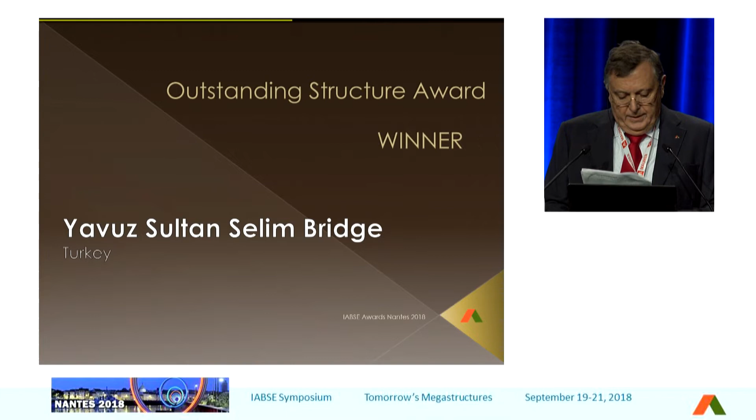This year we have the Yavuz Sultan Selim Bridge, the third Bosphorus Bridge in Istanbul, considered as the future of transportation and commerce for Turkey, linking Europe and Asia by its major importance and its symbolic situation between the two continents. The bridge has become an iconic structure and a landmark of the Istanbul region and Turkey.

May I ask Naeem Hussain, please, who is the chair of the award commission. And the awardees, may I invite now Mr. Samet Sain, Mr. Thierry Delemont, Mr. Vincent Deville, Mr. Michel Virlogeux.

The laudation of this structure is that the Yavuz Sultan Selim Bridge exemplifies an outstanding concept of combining the advantage of suspension and cable-stay systems, as well as design and construction with the most advanced technologies in structural engineering. It epitomizes a holistic approach of engineering and architecture.

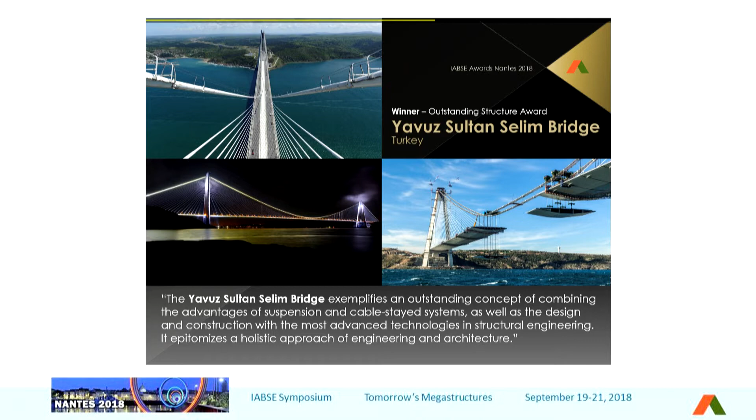Within this award, we also refer to the three finalists. The first one is the viaduct over the River Almonte in Cáceres, Spain. It's on the high-speed railway between Madrid and Extremadura, crossing the River Almonte through a 996 meter long viaduct with a great 384 meter concrete arch, making it the largest HSR arch bridge built to date.

May I call Mr. Pablo Jimenez, Mr. Guillermo Capellan, Mr. David Arribas, and Mr. Pedro Cavero de Pablo.

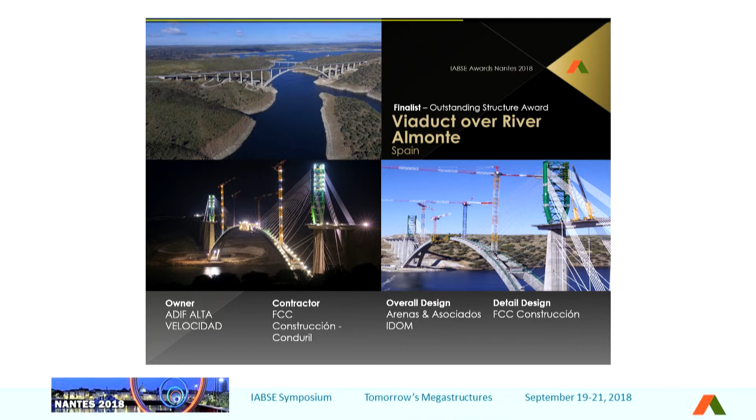The other two finalists are the Queensferry Bridge in UK and the Circle Bridge in Denmark. Unfortunately we do not have the representatives here, so we shall just give congratulations to them, and we give the awards to the chair. I'm taking this on behalf of the Queensferry Crossing people — I just happen to have a little bit of interest in it — and I'll give it to the awardees. Thank you.

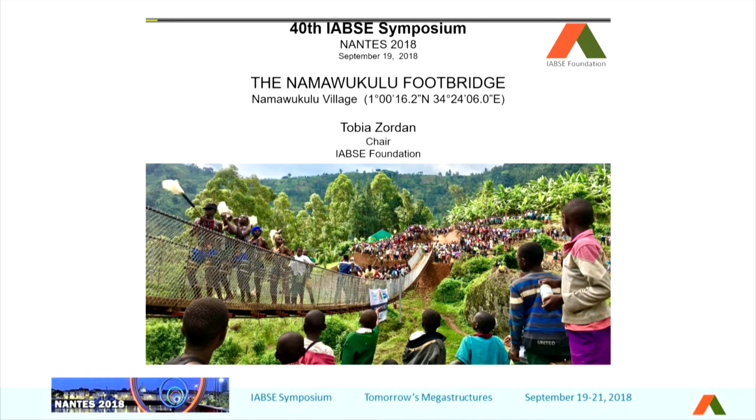Good morning, ladies and gentlemen. Thank you, Bruno, and thank you to the organizing committee and to IABSE for giving the foundation this space. I'm very pleased to be here today on behalf of the foundation to present our latest achievement. It's a bridge, a bridge in Uganda. It has quite an interesting story, and I hope you will enjoy it, and that you'll be able to share more challenges in the future with us.

A few words about the foundation. It is a totally independent and non-profit institution run on a fully voluntary basis. We receive funds and we give out funds, so as much as we receive, as much we are able to provide. The goal is spreading the knowledge of civil engineering and promoting education programs and self-construction in the most disadvantaged areas of Earth. The challenge last year was to build a footbridge in Uganda, a footbridge with a very high symbolic value and meaning.

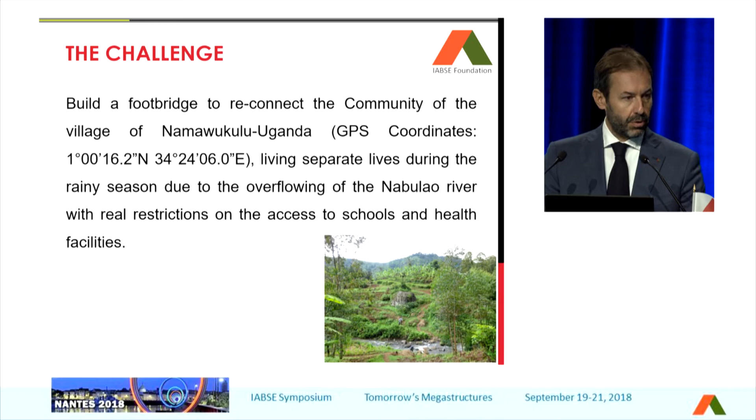A bridge can reunite two separate parts of a village which is cut by a river, flooded during many, many days of the year, more than four months. Of course that creates problems for locals, and we will see what kind of problems in a while.

The partners of this venture: the project was proposed by Bridges to Prosperity, and we took the advantage. It was a very interesting project. IABSE is all about bridges, so we thought it was a fantastic occasion to have the chance to build a bridge.

So we took this challenge. We decided we wanted to be partner in this venture, and we shared the price with Ramboll, the other partner that paid for 50% of the cost. But we are IABSE, we want to be not just a financial partner. We are bridge engineers, we wanted to be a technical partner. More than the money, we wanted to put effort, knowledge, strength, passion, and our sweat.

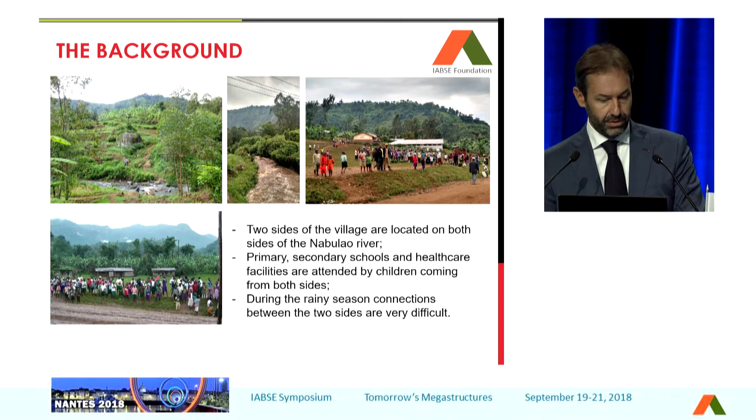The background: what we found was a village separated in two parts. A lot of children and locals were not allowed access to healthcare facilities and schools for a big part of the year, especially during the rainy seasons. You see here some short movies, a lot of enthusiastic boys, a lot of expectations to see what we could do, and if finally they could get a bridge that could improve the economy and the social relationship of the local community.

The project was provided by Bridges to Prosperity. This is quite a standard project. Of course, we are engineers, so the project was double-checked, and we thought it was very simple, very cheap, but also reliable. And we decided we wanted to go for it.

The most important part, the team of volunteers. These guys are engineers, and they decided to go on site and put everything they had in order to get to the final results. Young people, a lot of energy, a lot of enthusiasm under the flag of IABSE.

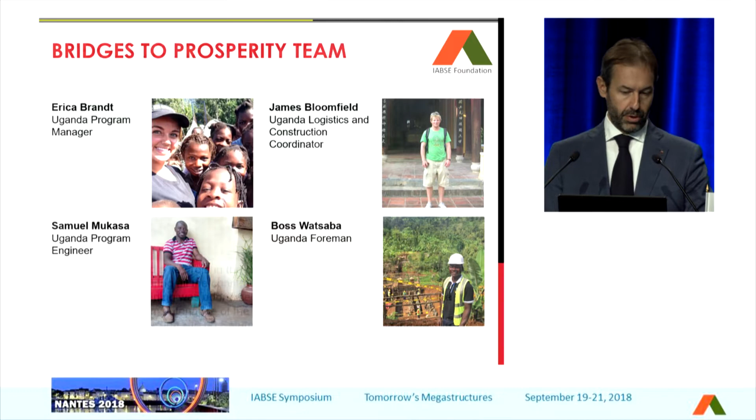Very good organization on site provided by Bridges to Prosperity. You can see here some of the people involved: a general manager, a manager for logistics, a local site engineer, and a local foreman to check everything was going on there. The local community played a fantastic and key role in the construction of the bridge.

They showed very high motivation. They were trained before the beginning of the construction, with a period of training, and on Saturdays the work site was fully open for the local community to come and enjoy, and of course contribute.

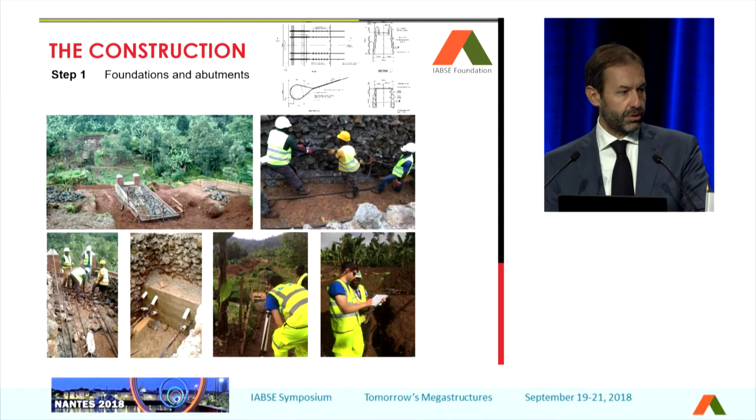Then the IABSE team arrived, and with the local team, Bridges to Prosperity, and the Rumble team, completed the foundations and abutments. Our engineers worked as carpenters to prepare all the details, to lay the cables, to bend the bars, to prepare the fences. And I have to say I'm very proud of it.

We started from the beginning, and roughly in one month we got to the completion of the bridge. You see here some phases. I have to say that I'm very thankful to the team that worked on that.

And we finally got the opening of the bridge with the dynamic test of the structure. Very risky actually, because we made some measurements about the frequencies, and we were very concerned when we saw people jumping and dancing on the bridge.

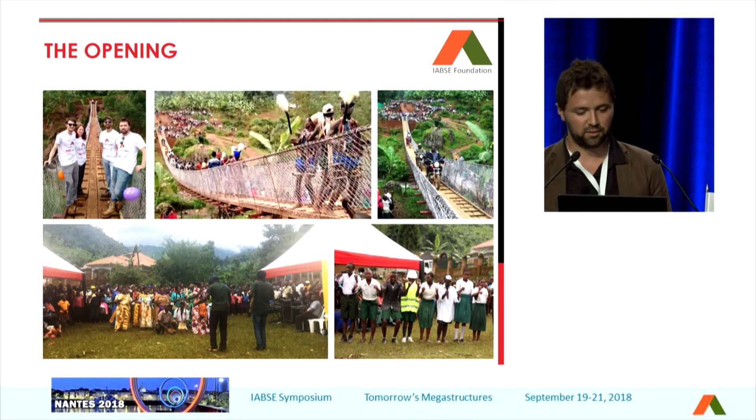This is, I guess from my knowledge, the first bridge built under the IABSE flags. So this is our bridge, this is your bridge, this is the bridge of all the members of these associations and of all the volunteers. We want to continue this. We have plans for next year. We would like to meet yourself again in September with another achievement. But of course,

we have to thank the volunteers, and you see their names from IABSE. They always were wearing IABSE t-shirts and IABSE flags everywhere. But more than that, we need you. So we need every single contribution, it's very important. So please help us by donating big money, little money, whatever you can, your time, everything is important. I hope we can continue. I hope you can help us. Thank you very much.

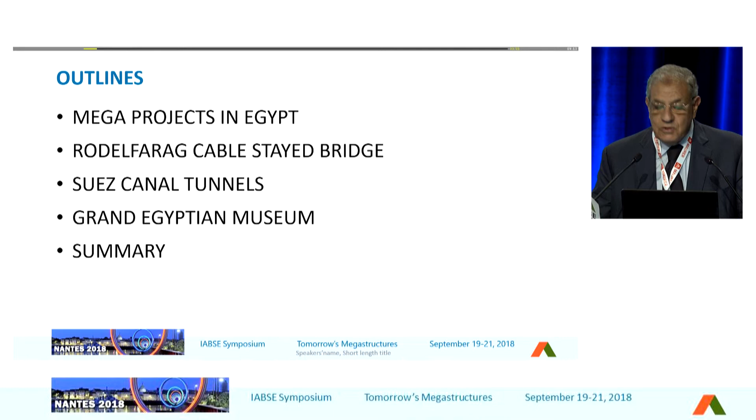The revolution in January 2011 took its toll on the Egyptian economy, resulting in a slowdown reflected in deterioration of the real GDP growth rate and increased unemployment. Total investment witnessed a material downward trend, and the country's foreign reserves were depleted significantly. This shows how employment and the Egyptian economy collapsed after the revolution. Consequently, rating agencies downgraded Egypt's sovereign rating by around 6 notches from January 2011 to July 2013.

We found that the only way to energize and activate our economy was to go for mega projects. During the last 4 years, mega projects in Egypt have been diversified. We started with a very big project, the doubling of the Suez Canal. We dug a new canal parallel to the existing one, with millions of cubic meters of dredging. During this period we used 22 dredgers, and we achieved this project in 1 year.

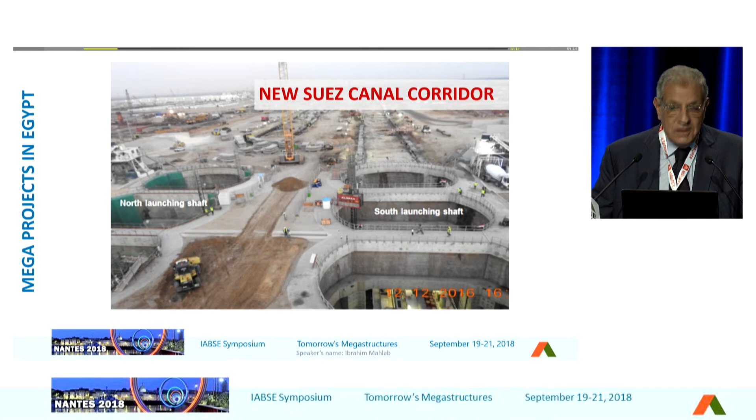The second one is electrical power station plants - we added 25,000 megawatts to our grid in 4 years, which I think is the biggest project in the field of electrical generation. Affordable houses: 1 million units are planned, and we have achieved 650,000 units so far. New roadways: 7,000 kilometers added to our network in 4 years, which is also a very remarkable project in Egypt.

Reclamation of the desert: we are adding 1 million acres to be reclaimed in the desert. New cities: 14 new cities spread all over Egypt, and a new administrative capital is now under construction. This means Egypt is now a very big site, working 24 hours, 7 days a week. Fisheries: we established a big fishery of 3,000 acres in the north of Egypt. Restoration of heritage and monuments: Egypt is full of heritage and monuments, and now we are starting to restore them.

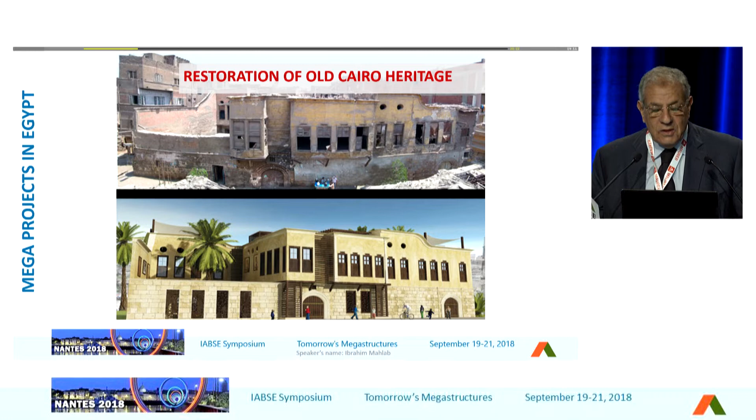Among Egypt's mega projects, the Rod El-Farag cable-stayed bridge is a remarkable bridge we can really present, along with the two other tunnels under the Suez Canal we have to highlight, and the Grand Egyptian Museum.

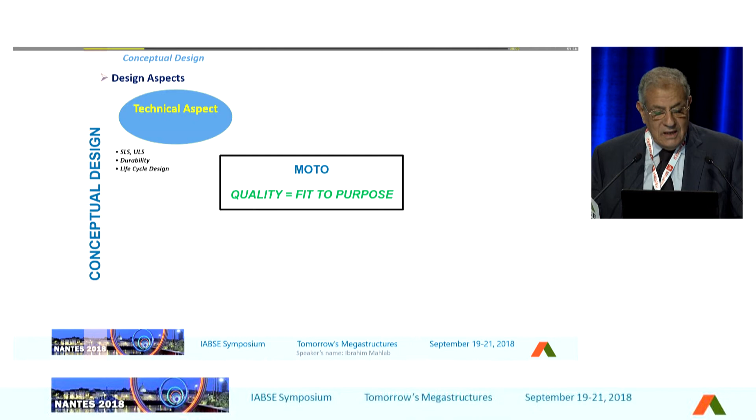Our motto is quality equal should fit to purpose, and this was the concept of our thinking: technical aspects, economical aspects, formal aspect, and environmental. Those are the 4 factors we worked with, because we don't have really time, and it is a question of how to select the most optimized, the most economical project, and to start immediately construct.

Design condition, functions, client wish, budget, resources, location, construction - give us the design aspects, design alternatives. Always we have to think about value engineering and to choose the most optimized project.

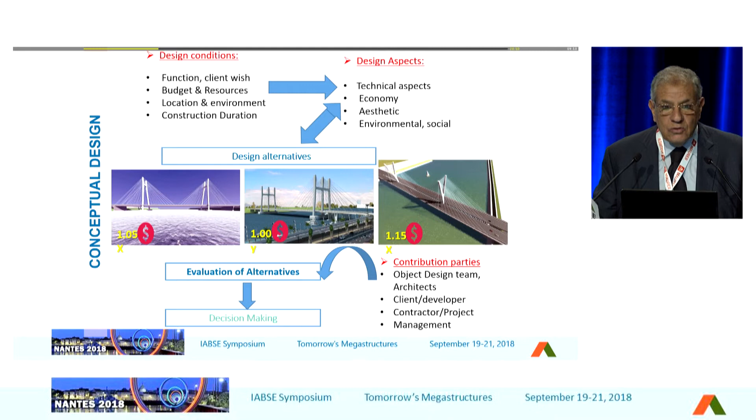Always there was a committee from the object design team: architect, client, contractor, project, and management. This was a permanent team working to select the most economical project. It gave us the evaluation of alternatives and the decision making, and decisions were taken really in a very short time - this was the big challenge.

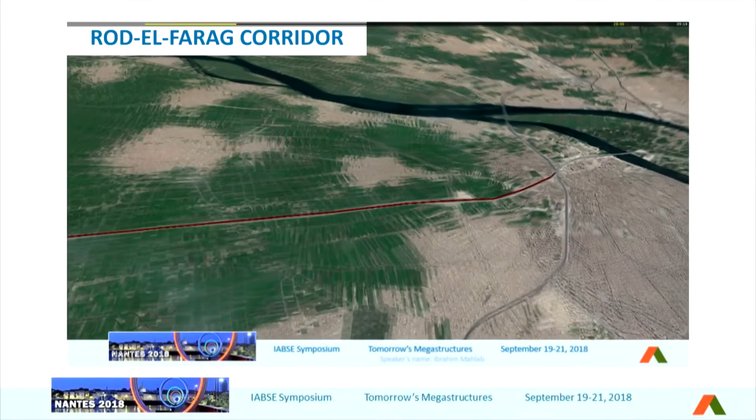This corridor has two stages. The first stage is 29 kilometers of routes, linking the west and east of Cairo. The first stage was an elevated route, 29 kilometers elevated, with 9 small viaducts and 12 underpasses and tunnels.

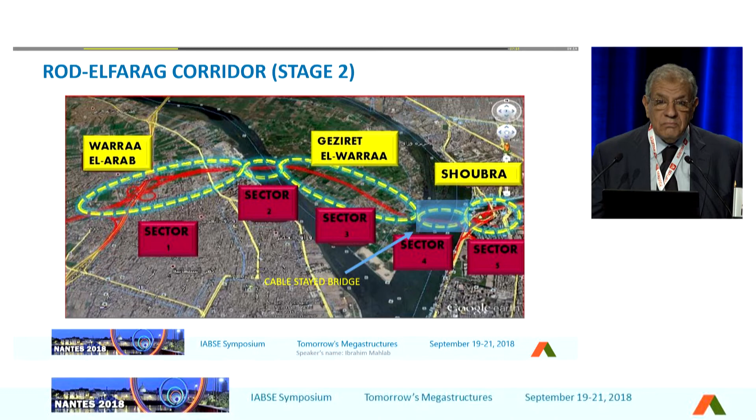This was sector 1. Sector 2 is 5 bridges. The stage 2 is 5 sectors. The first one is a bridge with precast beams. The second is a cantilever carriage pre-stressed bridge crossing the Nile. The third is also a viaduct crossing an island. The fourth is a viaduct crossing a very congested area in Egypt, Shoubra.

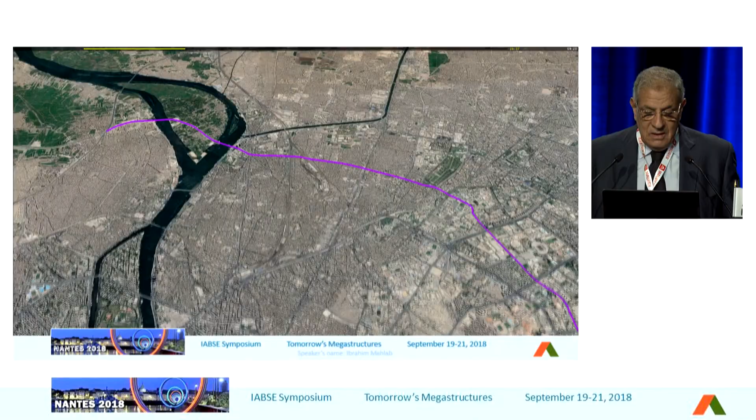The cable-stayed bridge is sector 4. This cable-stayed bridge is very special because it is the first cable-stayed bridge crossing the Nile.

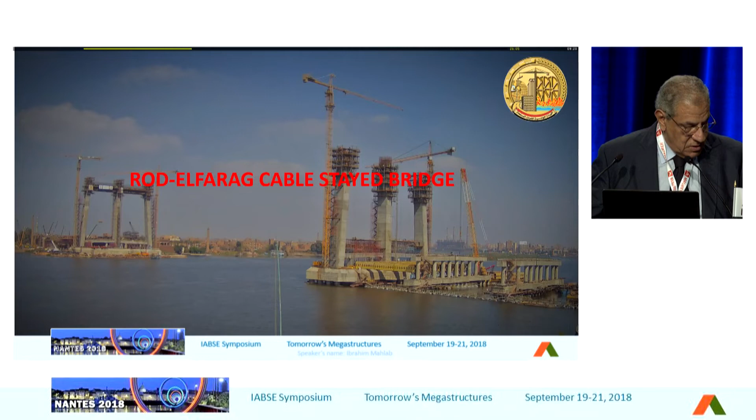The bridge has a semi-floating bearing system in the longitudinal and transverse direction. The bridge is floating in the longitudinal direction in which the wind and seismic loads are carried by cables and towers, while the bridge is supported transversely by bearings to carry transverse loads due to seismic and wind loads.

The side span of the bridge has a concrete box section to work as a counterweight to the main spans under live loads, although its arrangement is not usual for such a side span to span ratio of 0.4. In construction, due to the bridge's heavy cross-section, it was constructed using a rigid temporary formwork, specially designed and constructed for supporting those heavy loads.

The bridge may also be one of the widest bridges in the world, because the width varies from 64 up to 88 meters. Those are the heights of the bridge pylons. It was constructed by climbing form. Every segment is 4.5 meters.

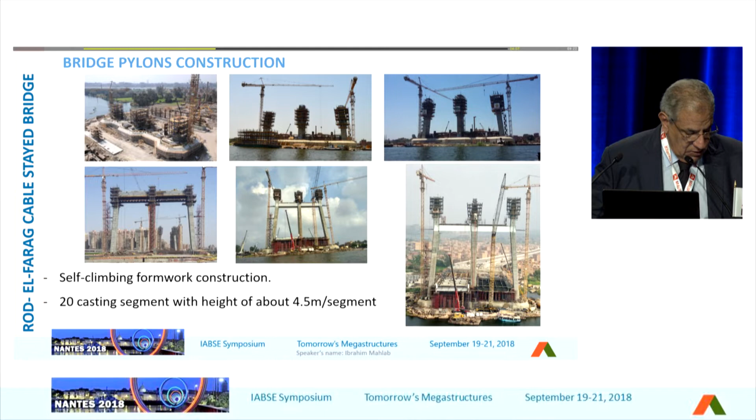The 95 meter height two pylons have hollow concrete cross sections. The construction of pylons was carried out using self-climbing formwork. Each pylon leg was divided into 20 casting segments with a height of 4.5 meters each, with 6 platforms, considered among the highest of this construction type. The figures show respectively the pylon cross-section segment and the adopted self-climbing formwork.

This is the pylon head - a steel pylon head. The top cable anchorages are implemented in steel box units that work as the inner shuttering of the pylon head. This was fabricated outside in a workshop, and because of the angle and accuracy required, the tolerance is almost zero. This is really the pre-assembly of units for geometry control.

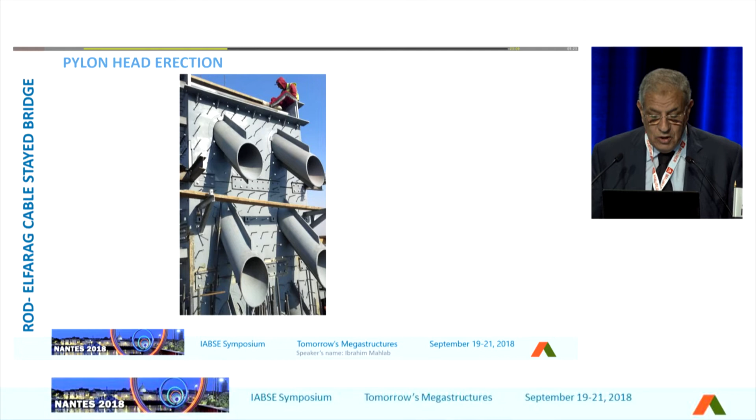The pylon head erection: after assembling it in the pre-assembly workshop, we transferred it to the site and started the erection. The deck segment in the main span has 20 segments of steel composite open section of 14-meter length. Every segment weight was about 180 tons.

Precast concrete slabs are arranged on segment top, and this was also pre-assembled in a pre-assembly workshop. Then we had to transfer it by barge and lift it to the site.

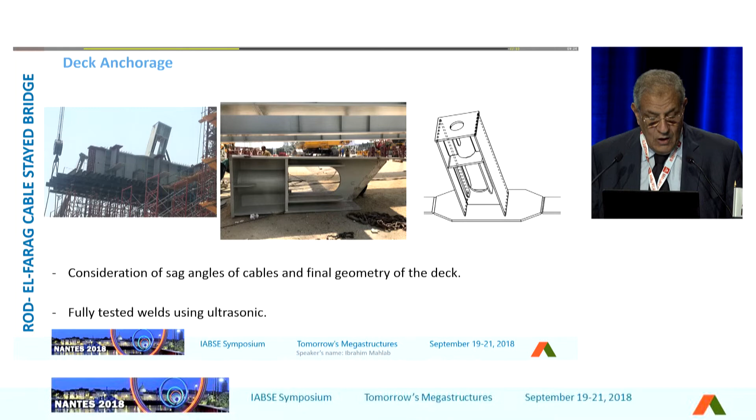The steel deck anchorage: deck anchorage fabrication, consideration of sag angles of cables and final geometry of the deck, fully tested welds using ultrasonic testing.

The main span deck segment is pre-assembled in the yard. We are assembling 3 segments, and all the holes are fitted at the workshop. This is how we are assembling the deck segment in the yard.

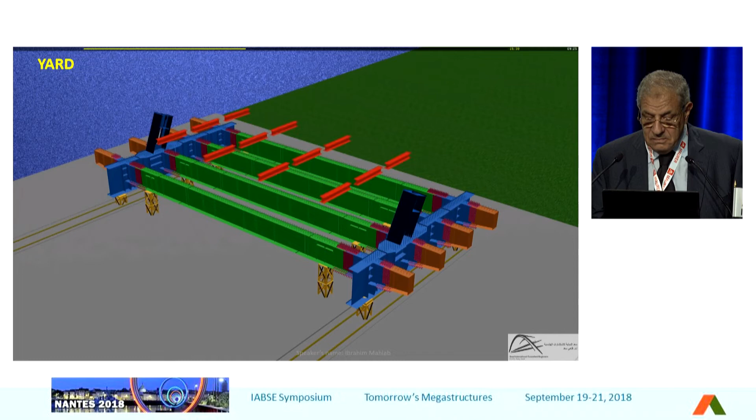The cross beams are then moved, and the other segment comes. This is the second segment - it is very accurate how to fit, that the holes should be 100% accurate when we are assembling it at the site. And the third segment is coming.

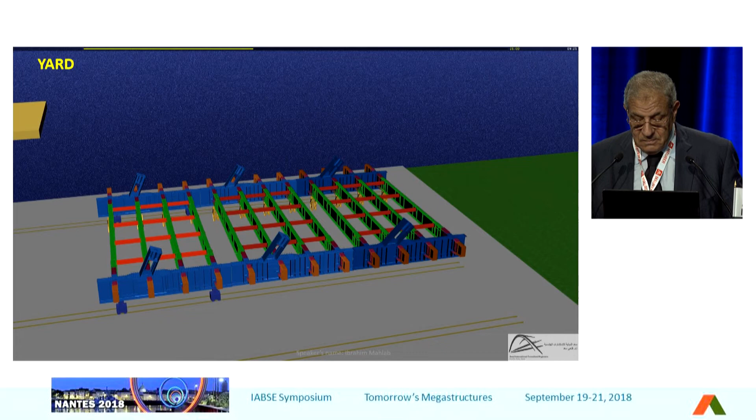Then we are lifting it by cranes, putting the segment on the barge, and going to the site to be assembled there.

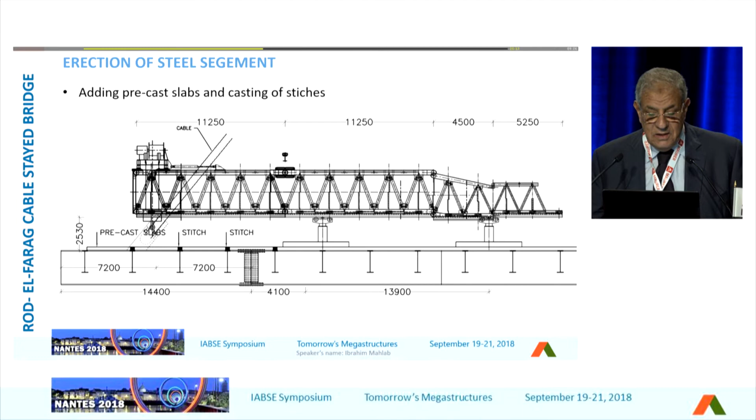Then we add the precast slabs, and then we are stitching the slab.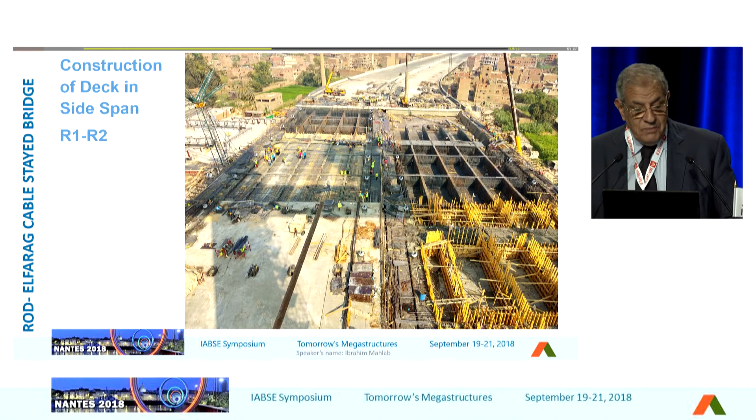This is the concreting of the side span. This shows the construction of the pylon. The main span was 300 meters, with two side spans of 120 meters each.

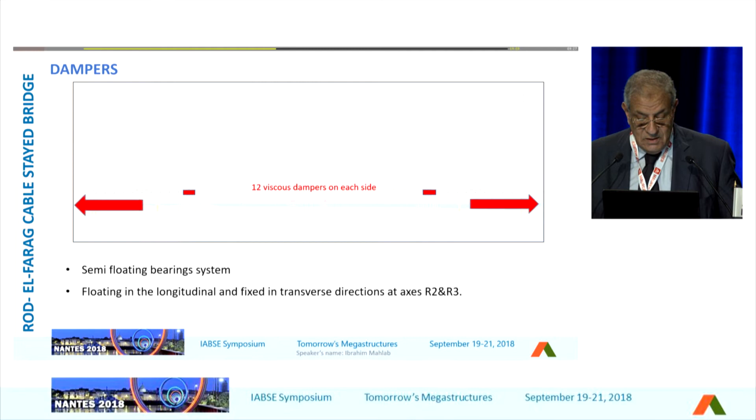This was the erection of the first cable, and now I think they are starting the erection of the second cable in Egypt.

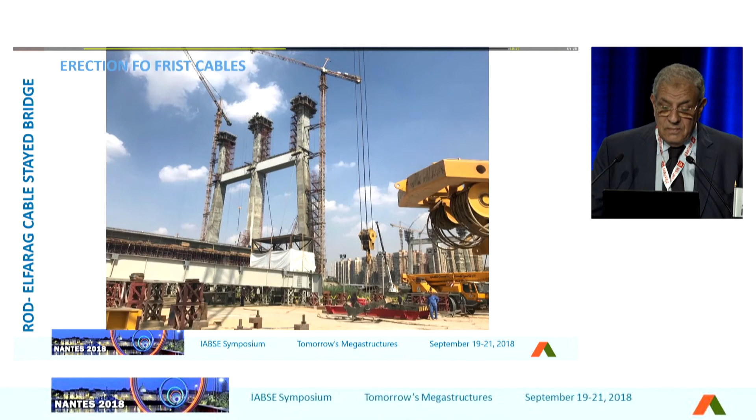In figures: total piling length, with diameters of 2 meters and 1.5 meters. We used 8 kilometers of 2-meter diameter piling and 15 kilometers of 1.5-meter diameter piling. Total structural steel reached 10,000 tons. Total concrete volume was 48,000 cubic meters. Total reinforcement steel was 19,000 tons. Total stay cables weighed 1,800 tons.

This video is from... okay, moving on to another mega project.

You know that in Egypt, the Suez Canal separates the west and east parts. The east part is Sinai, which is in Asia, and the west part is mainland Egypt. We always have to cross the Suez Canal by bridges.

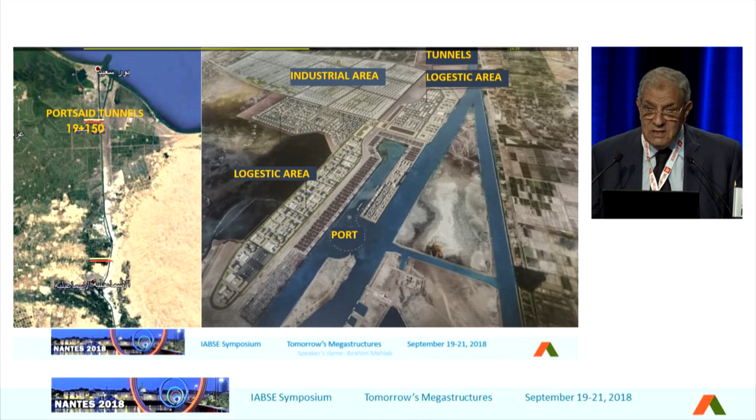We constructed a cable-stayed bridge over the Suez Canal, but we also need four tunnels, which we are constructing now under the Suez Canal. The Suez Canal is very important, not only for Egypt but for the whole world, because Egypt's location is at the center of the world, linking the Red Sea with the Mediterranean and the Indian Ocean with the Atlantic Ocean. This means it is a very important location in the world.

We thought about those four tunnels, and at the same time we are creating an economic, logistic, and industrial zone in Egypt, east of the Suez Canal.

The project's purpose is to establish a direct access route from the west of Egypt to the east, without crossing any obstacles, and to connect the international coast road with the west side of the Suez Canal, reducing the crossing distance by 100 kilometers compared to the current situation. It will also serve East Port Said and the investment-free zone, providing new investment opportunities and accelerating urban development in Sinai.

This also encourages citizens from the East Delta to relocate, because Sinai represents almost 6% of Egypt's area but has very low population, only around 500,000 people, while Egypt's total population is 100 million. That's why we want to encourage people to go and live in Sinai.

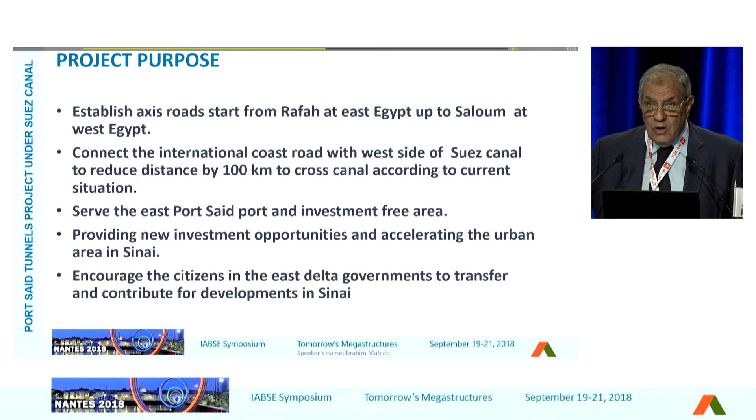A key technical project challenge is tunneling through silty clay layers without affecting navigation in the Suez Canal. This is very important, that we are constructing the tunnel without affecting canal traffic.

The tunneling boring machine required modification due to dissolved methane gas, as this area is full of methane gas layers. Transferring material was another challenge: how to move material from the west to the east side.

We found this to be the worst soil condition in Egypt. The clay layer is very soft, highly plastic clay, 42 meters thick, with NSPT values of less than 5. The sand layer is very dense quartz sand, 70 to 120 meters thick, followed by a hard silty clay layer less than 3 meters thick within sand layer 2. The groundwater level is above mean sea level and chemically very aggressive.

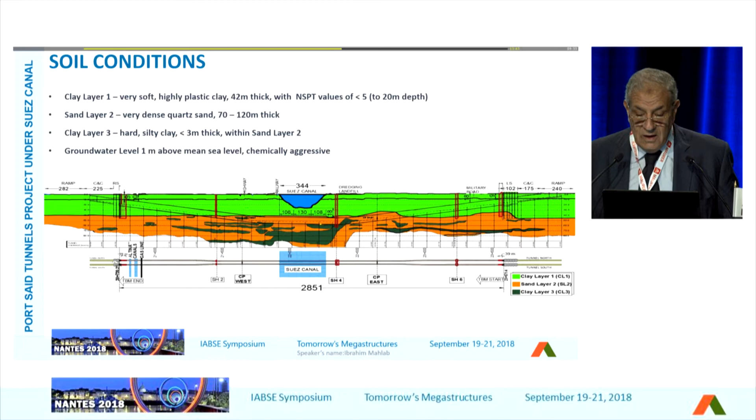We began soil improvement and had to face the methane gas challenge, since the risk of explosion, fire, or gas flooding was very dangerous. To mitigate this risk, a working group of all parties reviewed applicable codes and standards, investigated to define the gas hazard, and identified options and modifications for the tunneling boring machine.

This is the project layout: in the middle there is the north tunnel and south tunnel. We constructed a launching shaft on the east side and a reception shaft on the west, plus a cut-and-cover area and an open security entrance.

In figures, for the Port Said road tunnels: the diaphragm wall on the west side is 510 meters, on the east side 430 meters, under the canal zero, giving an overall diaphragm wall length of 940 meters.

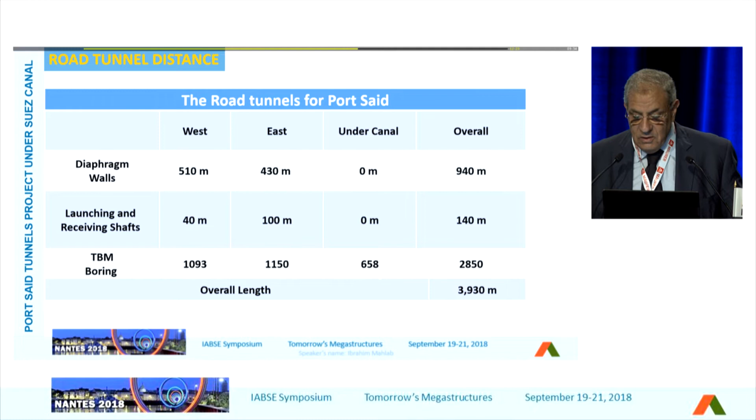The launching and receiving shafts: west 40 meters, east 100 meters, overall 140 meters. The tunnel itself, bored by the tunneling boring machine: west section almost 1 kilometer 93 meters, east section 1 kilometer 150 meters, and under the Suez Canal 658 meters, for a total of 3.9 kilometers.

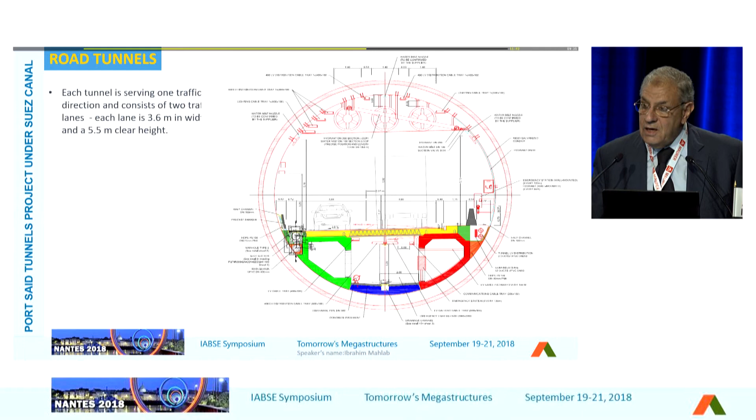We used 14 diaphragm wall equipment, 48 forming concrete equipment, 56 excavation and backfilling equipment, 76 joint equipment, 8 soil injection equipment, and 59 mechanical works equipment. Overall there were 261 pieces of equipment at the site.

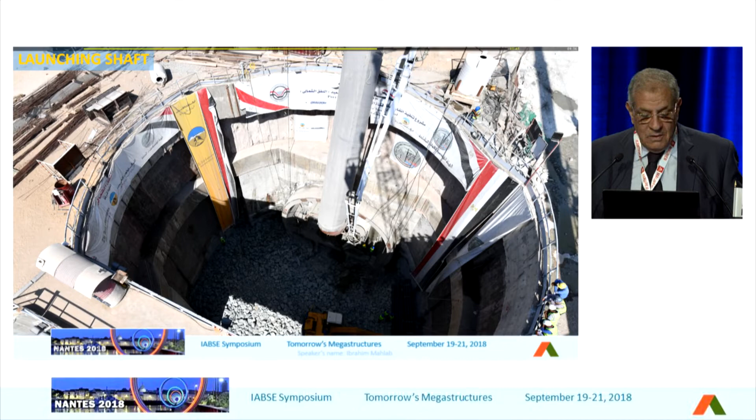This is the east launching shaft, and we can see that is due to the very bad soil. It was an arched shaft. This is the launching shaft.

The TBM factory test, the tunneling boring machine. We start to assemble it at the site. This is when we finished, and this is the breaking out for the machine.

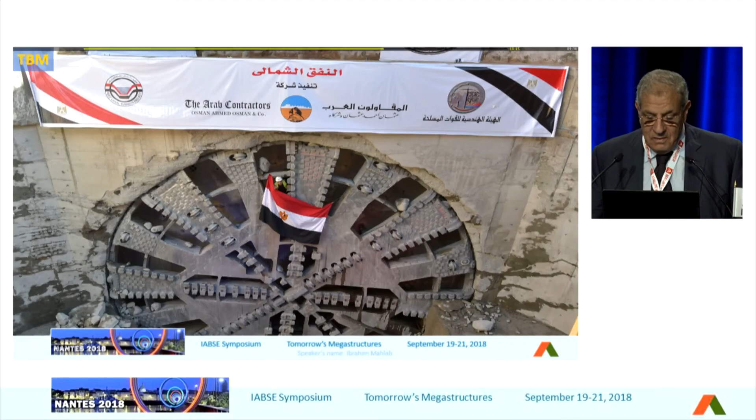This is the road deck. It was precast, and now we are fixing the road deck in the tunnel. This is planned to be open mid of next year.

This is the cut and cover and diaphragm and the struts. This is the cut and cover area.

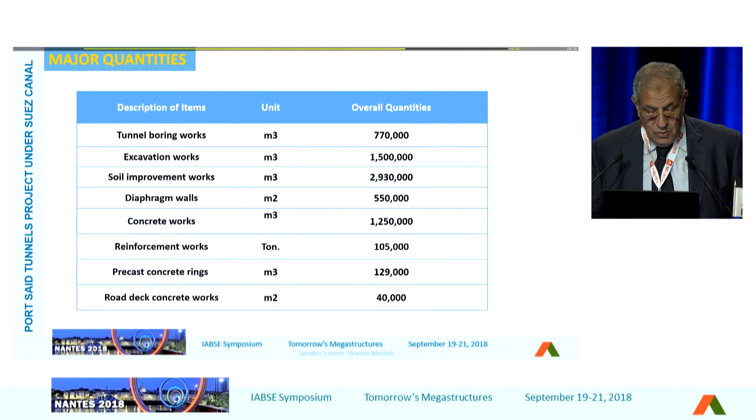Major quantities: the tunnel boring works, 770,000 meter cube; excavation work, 1,500,000 meter cube; soil improvement work, 2,930,000 meter cube; diaphragm wall, 550,000 meter square; concrete works, 1,250,000 meter cube; reinforcement work, 105,000 ton; precast concrete rings, 129,000 meter cube; road deck concrete works, 40,000 meter square.

From this figure, you can imagine the challenge, because we started at the beginning of 2016, and almost the tunnel is structurally finished.

Last but not least is the Grand Museum.

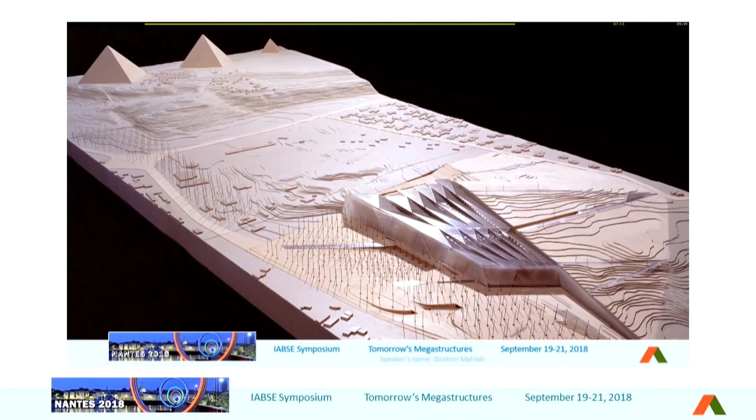This is the Grand Museum on the plateau of the pyramid. It's 2 kilometers from the pyramid. The architecture design was the result of a competition, and this was the first prize.

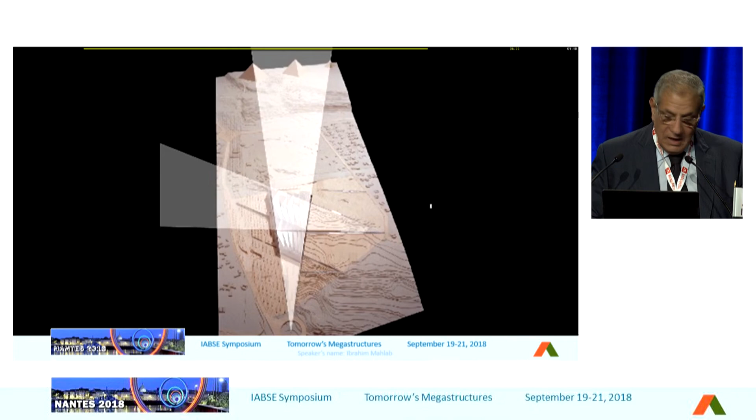The architect's design of the museum was based on the concept of pyramid formation in both elevation and plan views. The main building footprint was planned based on the pyramid's plan grid lines. This is the relation between the structure and the monument, the pyramid.

The sight lines regarding the three pyramids, starting from exact points at north and west, intersect with each other forming the building footprint. This is the idea of how the projection in elevation and plan intersect to create the location of the museum.

There is an entrance courtyard. The entrance courtyard contains a long span opening with a mesh roof, primarily for shading. The entrance is located at the heart of the master plan.

If we look, there are 27 components, but the structure itself is 1, 2, 3. Those are the structure, but the others are landscaping.

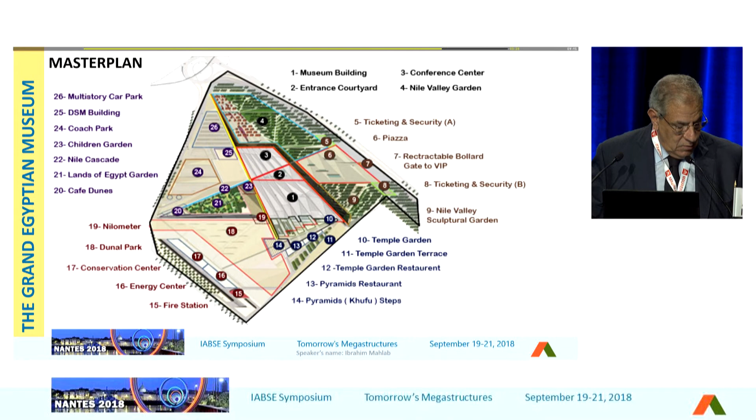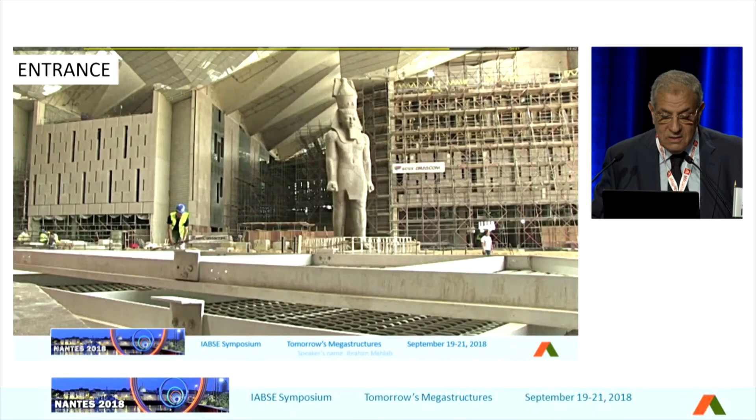In the entrance, we put the statue of Ramses. And there is a history for the statue. This was relocated from a very congested area to the museum.

This is another project, but it will take a long time to explain. This was covered by more than 70 international television channels for the relocation and transportation.

This was the original place, in a congested area near the railway, but the pollution and congestion forced us to relocate it, and we transferred this statue in the year 2006 to the site of the museum.

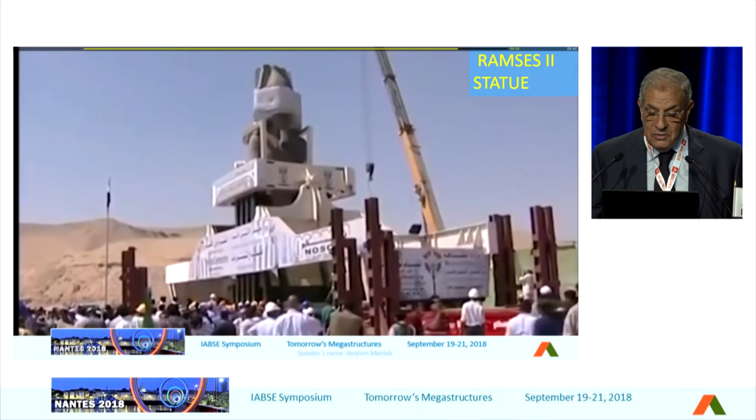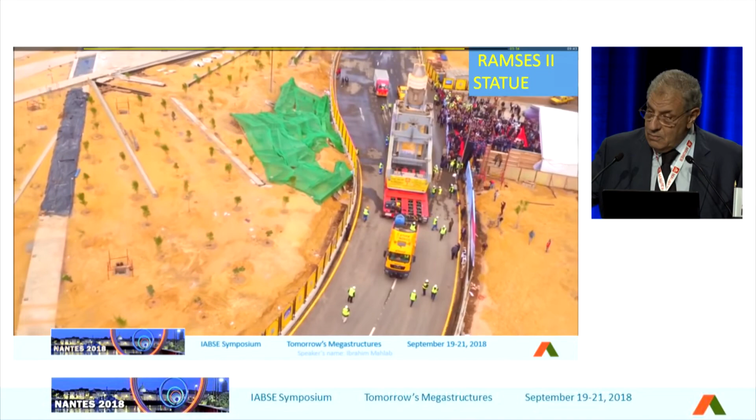It took more than one year for the safe transportation of this statue. This year we moved it from storage in the museum to its final place in the entrance. We considered him as a king, and there was a small parade and festival to receive King Ramses in his final place.

This is the main place in the museum.

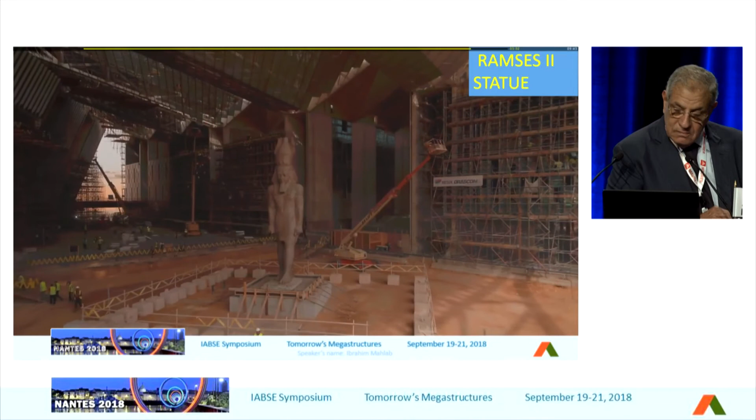This museum is planned as a museum of art and craft of ancient Egypt, described as the largest archaeological museum in the world. The museum is under construction and is scheduled to open.

The full structure is finished. Now we are in the finishing, landscaping, and electromechanical works stage. This is the main building roof, which I described, the steel trusses.

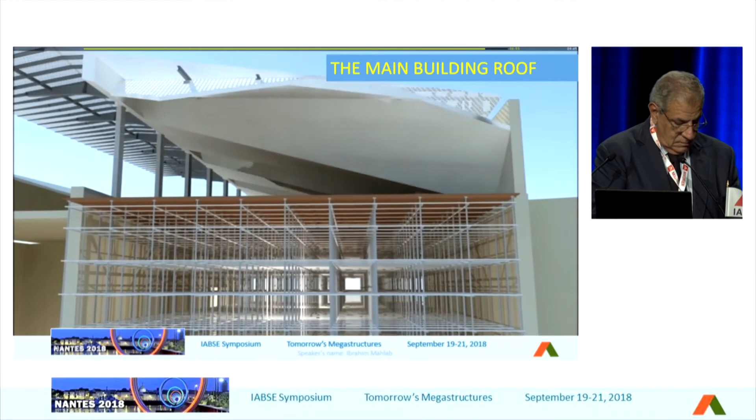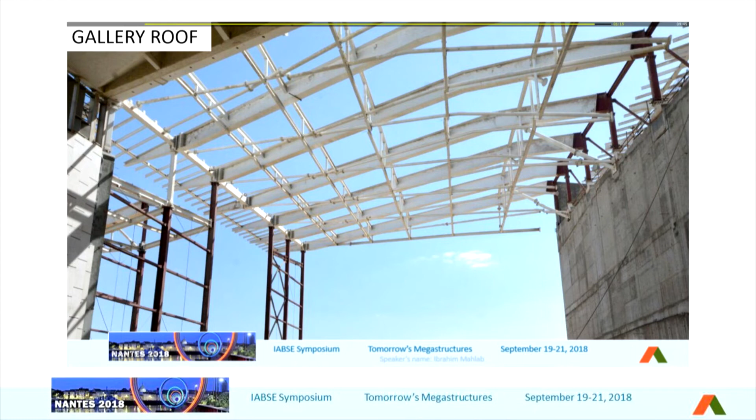The main building roof and gallery roof. Over the museum and conference center, a concrete folded plate roof together with external shaded void and internal ceiling void fill the roof volume, as shown in the photos.

The main building structure system consists of a steel beam grid with I-beam cross-section. The main beams are supported by the main trusses of the roof, while the secondary beams rest on the main beams. This is the grand stairs.

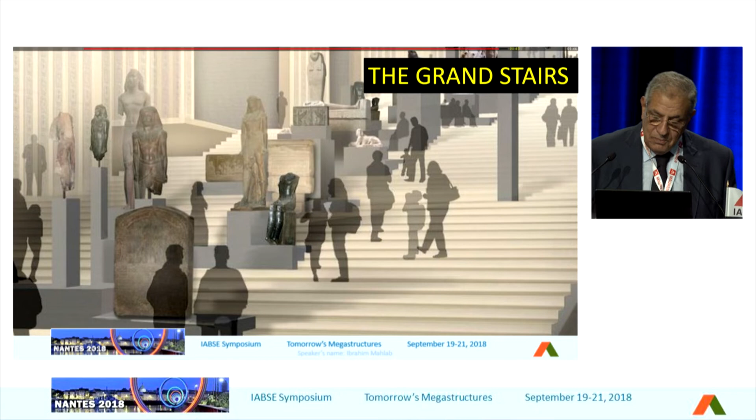The grand stairs wall consists of 2 sets, and people are going to sit on the steps, and from the steps they can look to the pyramid.

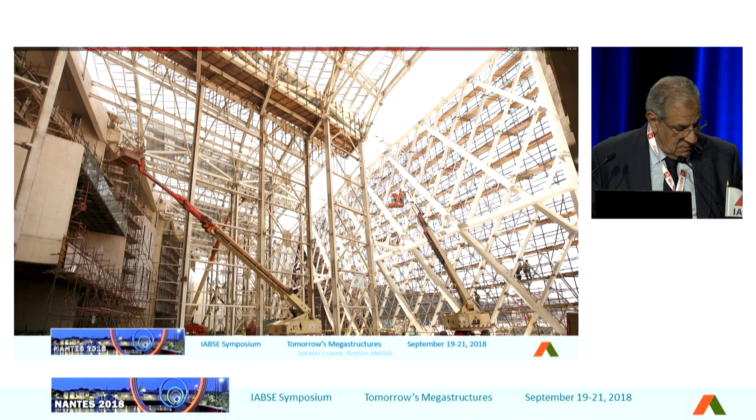At the entrance opening, mega steel panels are used to support the facade cladding. During construction, the fixation of steel diagrid in the concrete wall was followed by mounting the stone piles.

Those are transparent stone. In the sun it will be transparent; in the night it will be lighted from behind, between the steel trusses and the facade.

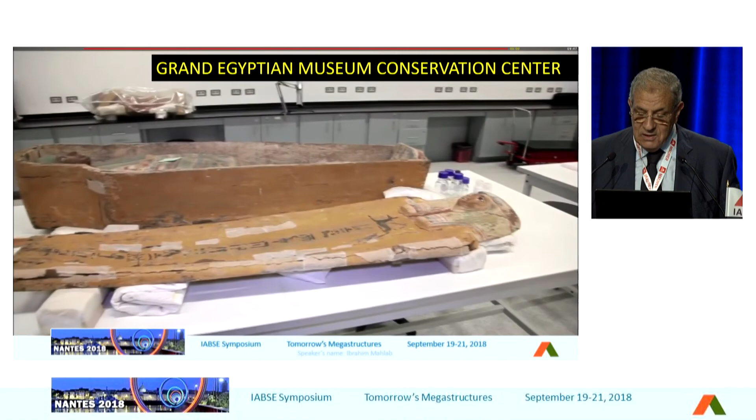At the same time, we have a big workshop in the museum for conservation, and there is a conservation center where all the monuments to be exhibited in the project are processed.

There was a very strict environmental strategy in this project.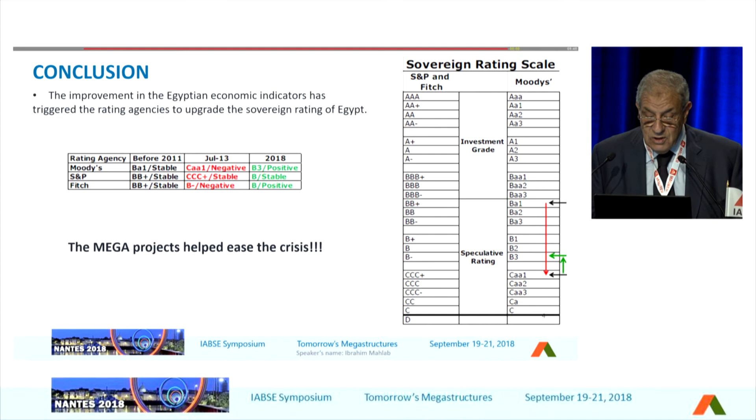Conclusion: we really achieved our goal. The improvement in Egyptian economic indicators after the downgrading triggered the rating agencies to upgrade the sovereign rating of Egypt. If you compare before, in red it was 2013, and the green is 2018. These mega projects really energized, activated, and put life into the Egyptian economy.

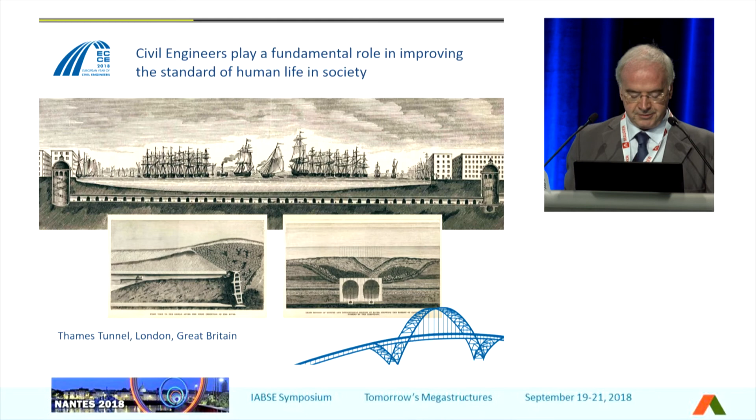During this year, ECCE wants to reinforce the fundamental role of civil engineers in society in improving the standard of human life, from the old year until now.

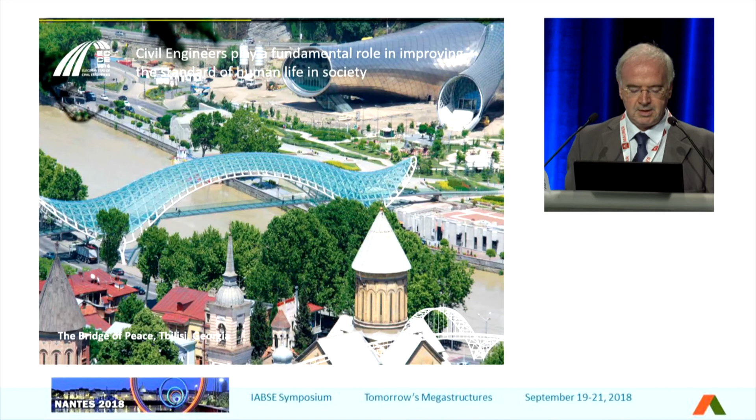We accomplished this through many different types of projects, including dams and reservoirs, water distribution and treatment facilities, road networks and bridges, foot bridges, rail networks, energy generation and distribution facilities, but also stadiums and cultural and social facilities, and many others like airports.

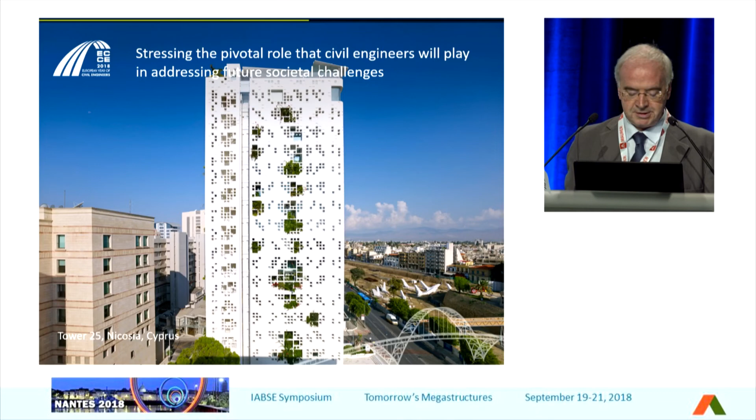Finally, ECCE wants to stress the pivotal role that civil engineers will play in addressing the challenges that will face society in the future, including rapid urbanization, climate change, and the digital revolution.

I hope this has given you a useful introduction to this year's EYCE, the European Year of Civil Engineers. So it's time now to move to some main features of the organization of our symposium.